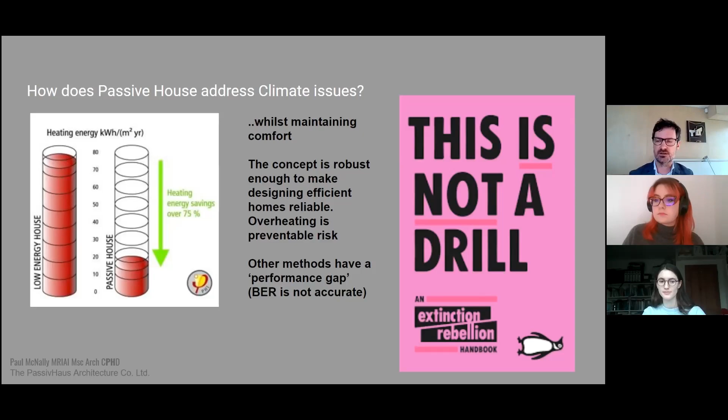So Passive House cuts through all those - from a designer's point of view, it eliminates all these risks and helps you design buildings that really work. We can get down to about 15% of the energy consumption of a conventional building with the Passive House approach.

The other thing to put into the picture is the Architects Declare movement. This is a concept that's new and emerging internationally, where various professions - in this case architects, but engineers too - are signing up to a voluntary declaration to deal with biodiversity and climate change issues, and to stand up and say we're going to work to best practice and change how we work, because it's pointless pretending that every architecture practice is acting to best practice - it's just not the case. There's so many things all of us can improve in how we provide professional services as architects.

You'll see if you read through this list, it's things like post-occupancy evaluation - this is where, even after we're finished our services as architects in the conventional sense, we go back for a year or 2 or 3 years and test the buildings, recording temperature, humidity and energy consumption, and ask ourselves: is this building performing the way I hoped it was going to, or set out to design it to?

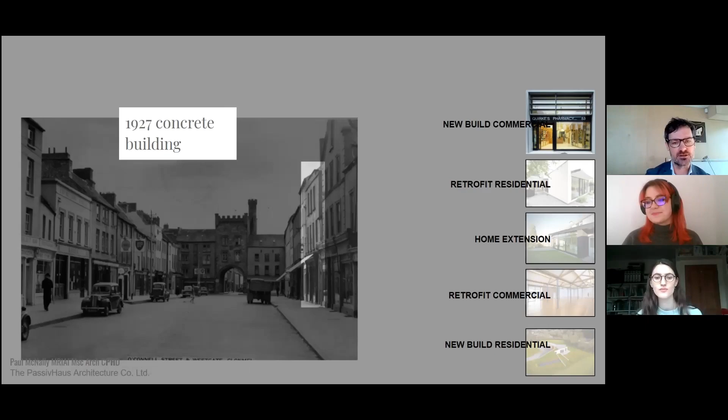The brief was to turn it from a terribly unheatable, uncomfortable building—where the client would have coats on in the back office and still be cold, it was so poor in performance—into something different. We retained part of the structure because we were supporting the buildings on either side, then completely demolished and rebuilt the building behind it. There's a laneway running up one side, underneath part of the next door building which leans over it, with an alley laneway access.

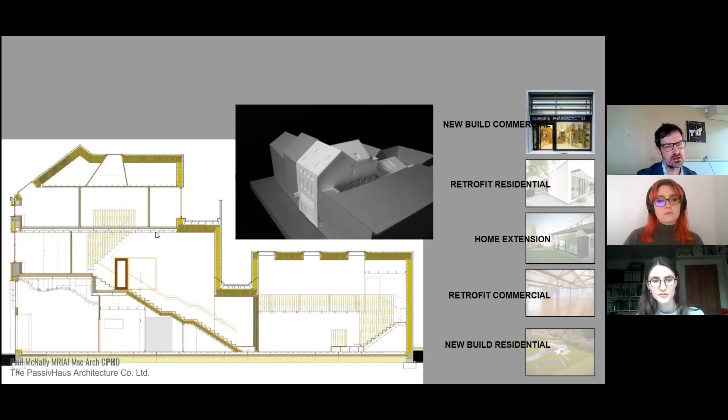And that gave us an opportunity to put an apartment over the pharmacy from a stairs off that lane. So this is a cross section through that stairs, if you like. So we have this 1.5 story shop floor of the pharmacy coming back to a 2-story mezzanine back of office space. And then we've got a two-story, 2-bed apartment above that.

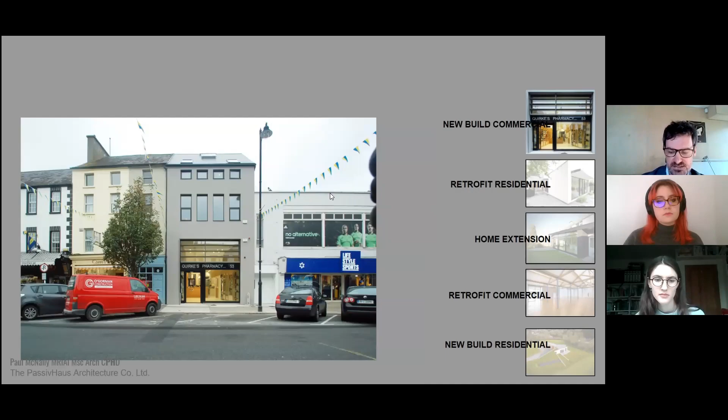So that's kind of the completed Passive House building slotted into the existing context of protected 18th century structures here and a 1960s concrete frame building there. And there's the laneway access underneath.

And there was a host of construction challenges of building in an urban centre with no rear of site access, but it was still possible to do it.

And that's kind of the image then of the shop floor with the double height space behind, and that's the shop counter. 1.5 stories at the front, getting lots of light in, solar control to stop overheating, which would be an issue if we didn't address it.

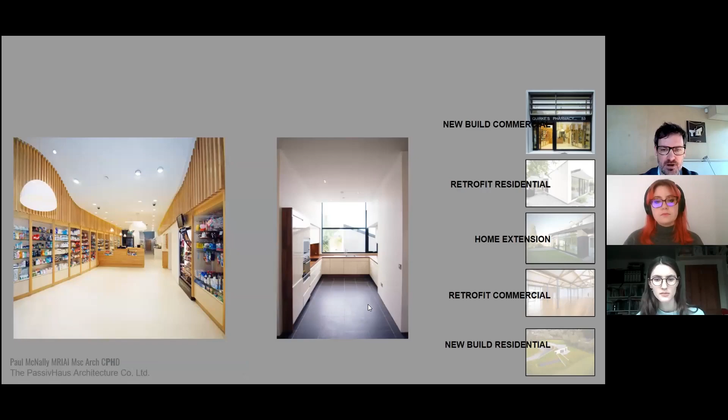And then that's an image of the apartment at the first floor level looking out to the rear. I won't spend too long on each of these projects, but just to give you a quick understanding of the results. So we achieved excellent comfort.

Client turnover went up. A huge sense of civic pride in Clonmel for this, to have a Passive House building. Ireland's first, there's only been 3 non-residential Passive House buildings in Ireland, and here's one of them, the first Passive House pharmacy, probably, there's not many of them in the world.

And it's an opportunity for learning then, like the local secondary school students come in here and do projects as part of their transition year on Passive House technology. And people are really interested in it. As I said, the well-being of the staff is greatly improved.

And then about a 90% reduction in the CO2 emissions compared to the building that we've replaced. And we've also reintroduced a residential use back into the middle of the town, which is really important because we all know about the hollowing out of towns and car culture.

Here's a 2-story, 2-bed apartment in the middle of town. There's no car parking spaces, and the client took a punt, in fairness, that this would be lettable. There was no guarantee that it was going to be lettable at all, and what turned out was the opposite.

Multinational companies, American multinational companies based in Clonmel, took up a rental on the apartment for staff of theirs that were coming over on sabbaticals from the States to do, say, 6 months training in Tipperary and then go back to the States. And the first group that took it loved the building and living in town so much,

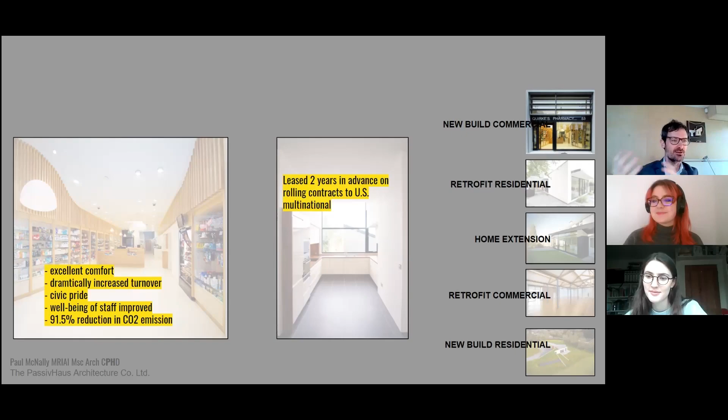So the client is delighted, and also now you've got a multinational that's really aware that their staff are living in a Passive House, and they're going back to the States going, what are we doing with these really dysfunctional buildings? And so it's helping to spread and disseminate that as an idea, which I think is great.

the certification process is the difference, that an independent certifier, going back to Germany, to Darmstadt, where the institute is, has looked at all the information that we produced. And if you do all the hard work and demonstrate that you've actually built a passive house, then you get the privilege of putting up a plaque on your building saying this is a certified passive house. And that really is, you know, the benchmark of quality then.

And that building then also won the RIAI award in 2015 for the best sustainable project.

The next quick project is just to show you, again, for a bit of variety, a retrofit residential project. So this is on College Road. It is a 4-bed detached 2-story house. This is the existing building before we renovated it.

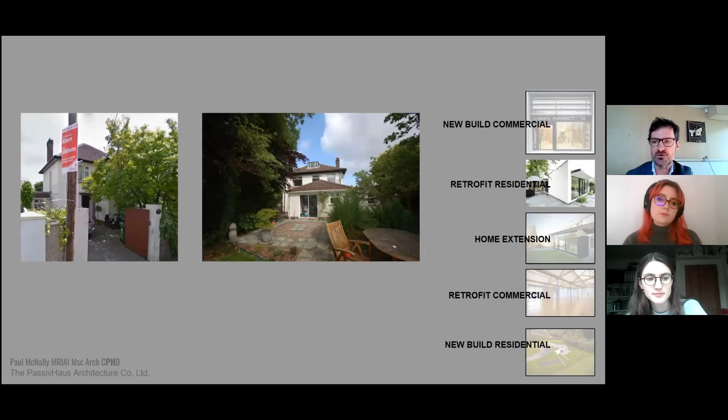And then a complete renovation, wrapping the whole building in insulation, triple glazing, dealing with all the air tightness, and then building on a passive house extension to it. And again, that's EnerPHit, which is the retrofit equivalent of passive house.

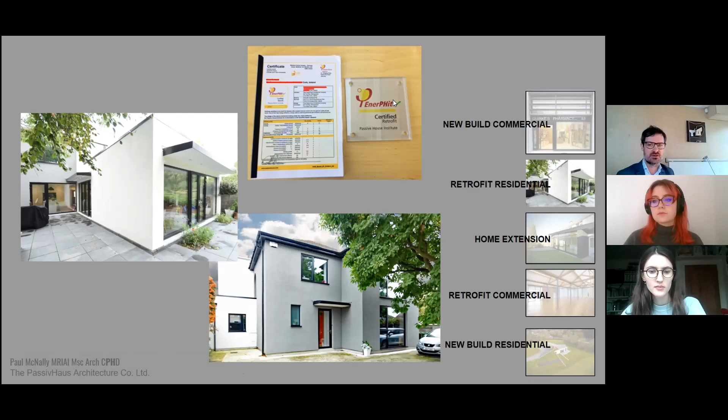So the next project then is a commercial retrofit. And this is a building that I completed, it's in Castlemartyr. And this is the main street in Castlemartyr, if you're aware of that, East Cork town.

And you have the humpback bridge that you cross on your way to Waterford, so it's right adjacent to that. You can see it when you're at the traffic lights at that point. And behind the main street, you have this Methodist church.

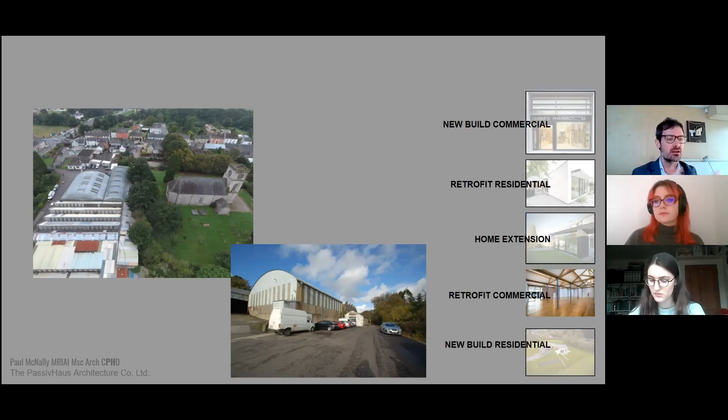The brief from the client, the kitchen manufacturing company, was to get rid of all this, demolish their old leaky building, and turn this into a state-of-the-art main office building. In fairness, it's quite a difficult thing to do with a building that's 200 and something years old. We had looked at just ignoring that building and doing a new build passive house office building, which would have been cheaper, but the client decided this building had enough quality and was exceptional enough that they would not turn their back on it, and they'd take on the extra cost of renovating it. This is what we started off with.

This is the existing building. You can see there's cast iron columns, these north-facing roof lights, which would have been state-of-the-art architecture 200 years ago for light industrial, really good daylight. You've got really good north light, so you're cutting out all that strong, direct southerly light that would cause glare, and you get this really even light from the north. So it actually was a fantastic building in its day, and really delivered a good environment compared to what people would have been used to at the time.

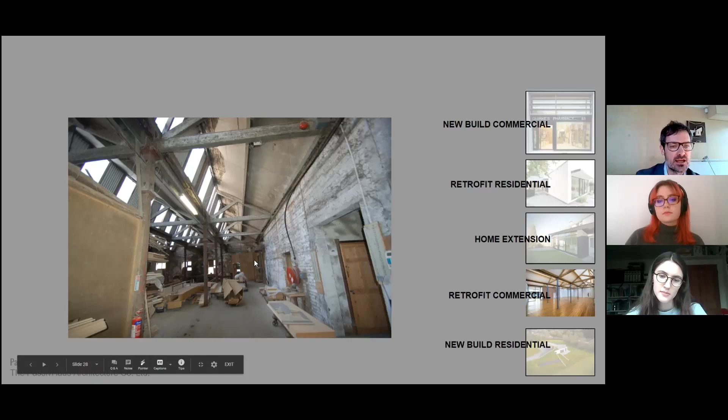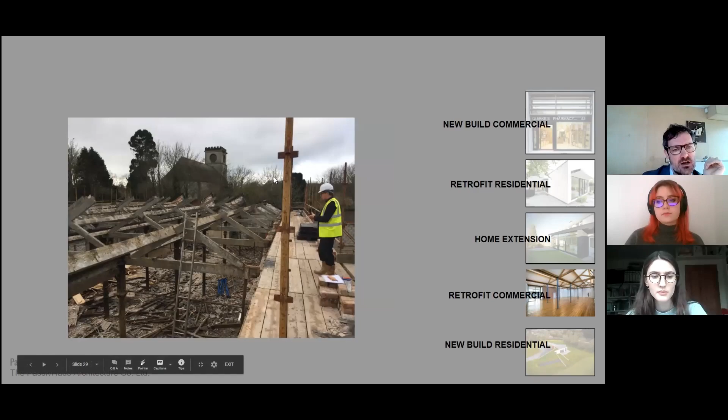But with these lovely existing brick rooms off this large open plan space, that was kind of what we were trying to hold on to. So we took off all the top of that roof structure, replaced rotten timber beams where necessary. We were able to hold on to all the original cast iron. In places, we could keep some of the original floorboards where they weren't too far gone, and then the original brick walls, the majority of them were salvageable.

The approach was, once it was cleared out, we put a roof on it and then super insulated that underneath, dealt with all the air tightness. We had to rebuild part of the wall, and then the existing walls, where there were brick and stone and lime mortar construction, got a lime plaster for air tightness and a wood fiber insulation on the inside. That's critical for these old buildings that have lime in the walls - you want to let the water vapor move through them.

It's called breathability. So there was a cork insulation in that lime mix, which starts to improve its thermal conductivity. Then you've got really good thermal conductivity wood fiber insulation, and that has a lime plaster on it. That creates a really good performance, but maintaining the original fabric on the outside.

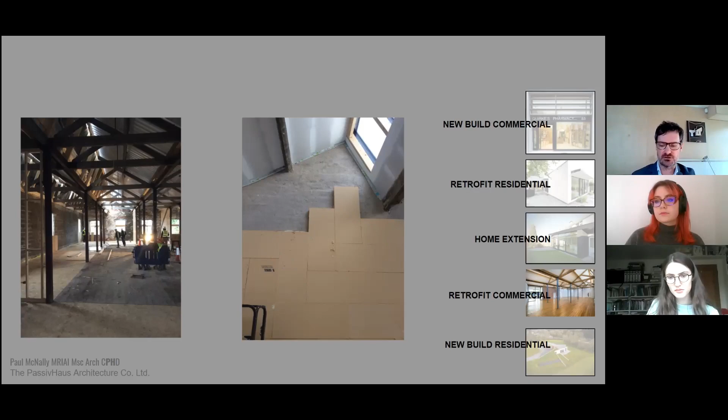Again, we're able to expose the original brick on the inside where it didn't need to perform a thermal function. But you can see the quality of the daylight here is fantastic - this is a really good place for the open plan part of the office. And then we've got cellular offices and meeting rooms around that.

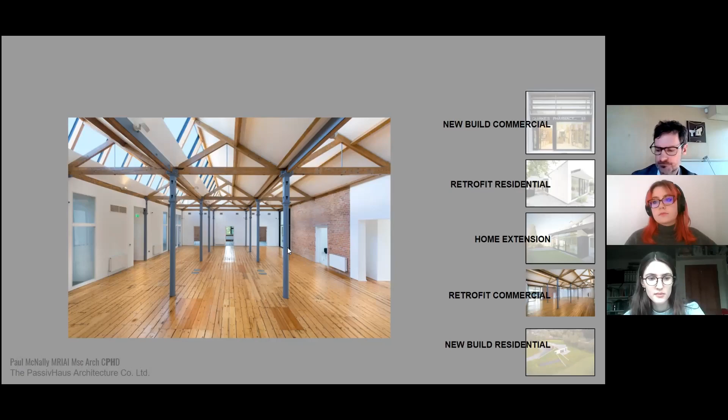The original fabric tidied up, repointed, re-roofed, and that's good to go for another, hopefully, 100 years.

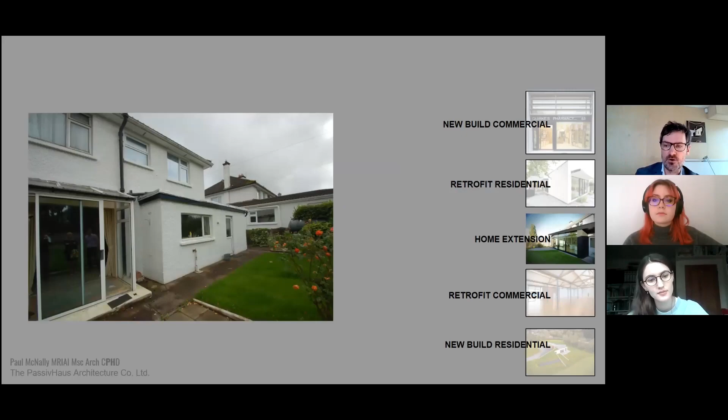Again, just to show you a different scale of the same approach - a home extension. This is at my own home here in Bishopstown, and this is what we had when we bought the house about seven or eight years ago, maybe more. This is the old original kitchen from the 60s, and there was a beautiful big garden, but very poor connection from inside to outside, and that's something that we're all trying to achieve these days in how we live. We want to kind of disappear that barrier between our external spaces and internal spaces.

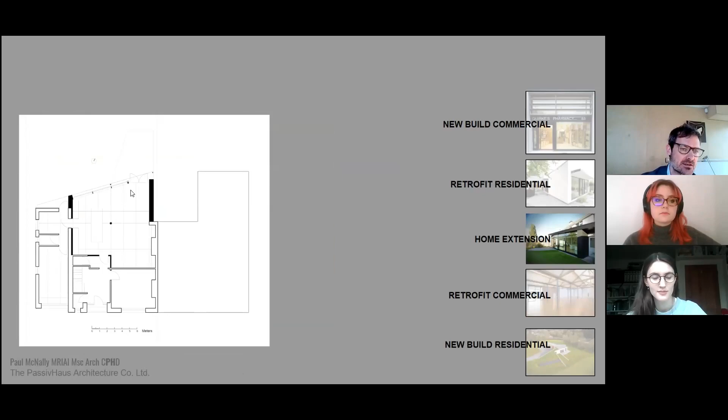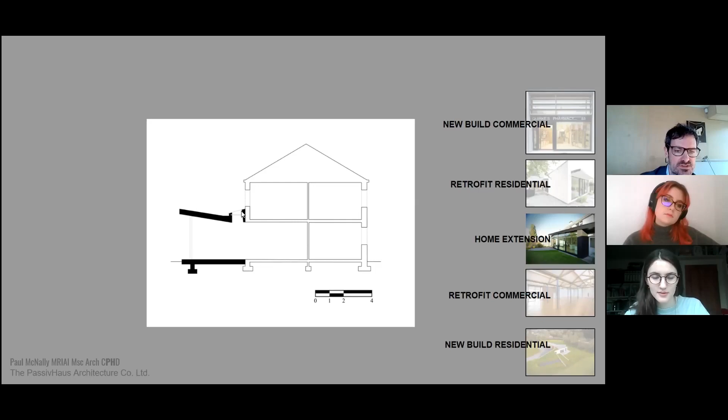So this is the back of the house, which is kind of northwest facing. The setting sun sets up here, so we cranked the plan to pull this space around and capture that setting sun in the evenings, and then tilted up the roof to do the same thing. So it's like a funnel that allows that evening light to get deep into the existing plan, so that this doesn't end up like a dark no man's land. And then we put a continuous roof light from one side of the house to the other across that point to get that light deep into the plan.

And there's that continuous roof light spanning across, and that's a triple pane roof light, which we wanted to get into as well, so really good insulation factor. Triple glaze - these are PassivHaus certified glazing, what's called curtain walling. So the glazing is continuous outside the structural part, and there's really good thermal qualities in where the glass sits, so high performance. All the thermal bridges are eliminated.

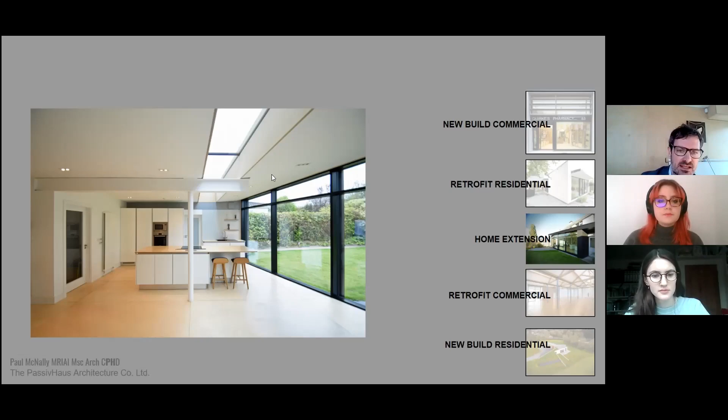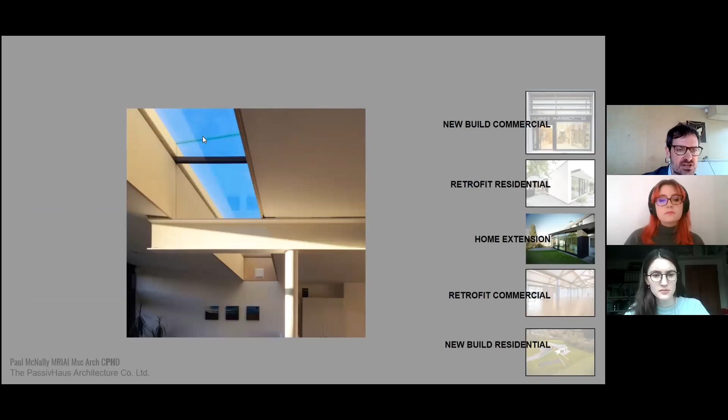And really thick insulation in the roof. This is the roof light again, just showing you the kind of detailing you have to get into at PassivHaus to reduce those losses at junctions. So you can see there's kind of a junction here. There's actually a glass at the upper level, which is what we call a rain screen, so that's doing all our weathering. But the space between it is actually pretty much cold.

And the heat, the thermal boundary is down as much as possible in line with the wall and roof insulation. So instead of having a triple glazed unit up here, which would have created a kind of tenuous connection at this point, we separate the two and drop the triple glazing down into this insulation, and we get insulation here above it.

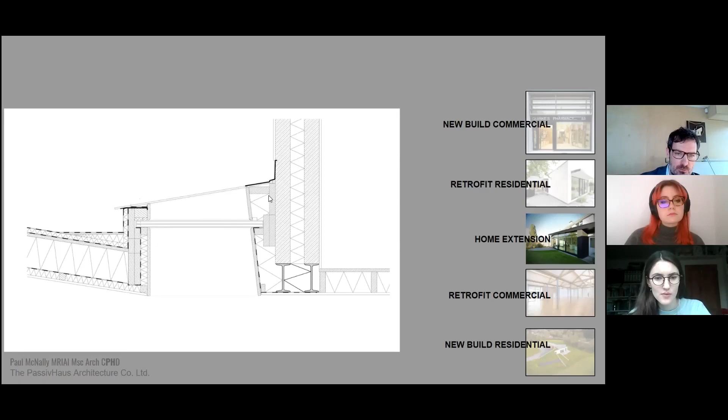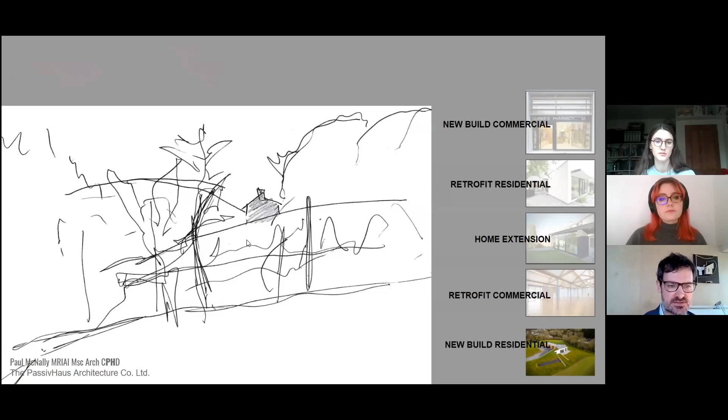And this was just a quick sketch that I did when I was there on site, just showing you this idea, showing the client that idea.

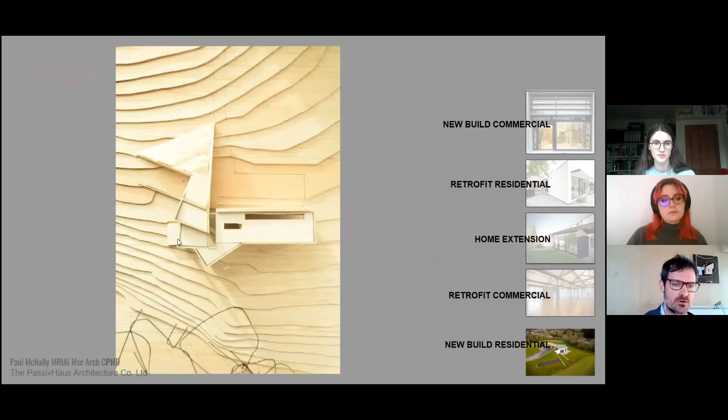So the design then - that alignment sets up this geometry where you have the dining room of the house pointing at that view on the horizon. And that geometry continues through the back of the building northwards, which gives us the ability to orient all the bedrooms on the eastern side of that block so that they're all getting morning sunlight. And then the rest of the living functions - your kitchen, dining, and sitting space - radiate around that geometry to track the movement of the sun during the day.

And that's not particularly a passive house necessity - that's just good building practice to get really good daylight quality. So as the setting sun is over in the west, it's shining into your living space, etc.

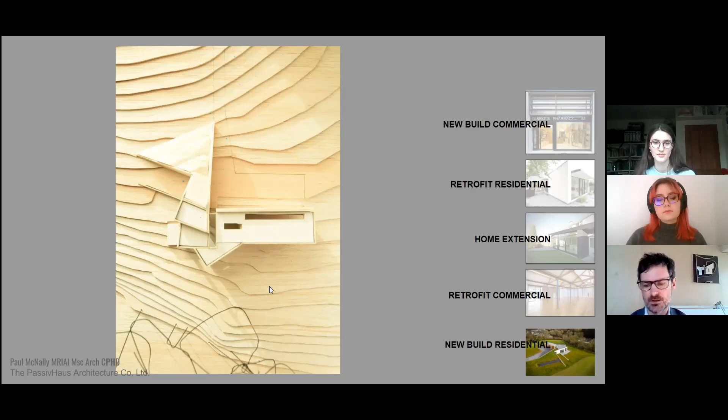And then because the fall of the site is quite dramatic, the idea was that we put in a series of terraces so that the floor levels would address that change. The building would kind of sit on the landscape rather than cut into it severely.

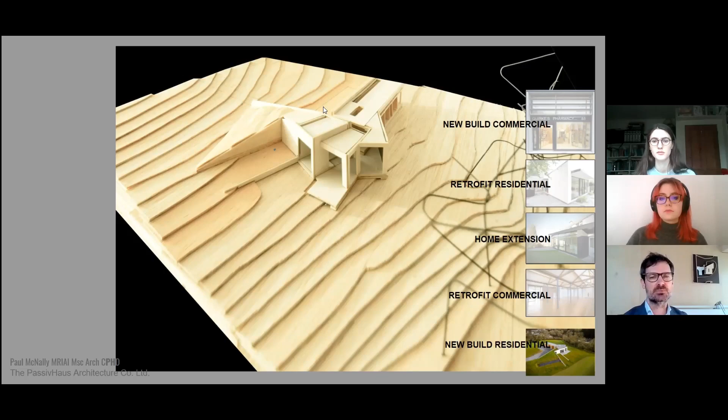And then the other idea was that the client wanted quite a discreet house from the public domain, from the road, which is up at this end. And the idea was that we would have a very blank facade facing the public road, but also would take the opportunity to just roll that landscape up onto the roof of the building, so that over time, when this becomes planted over the next couple of seasons, this will become very discreet. There'll be planting here, hiding that kind of car parking area - you'll have a blank facade. So the building is mute as you approach it, but then on the opposite side, it's almost fully glazed and very, very open.

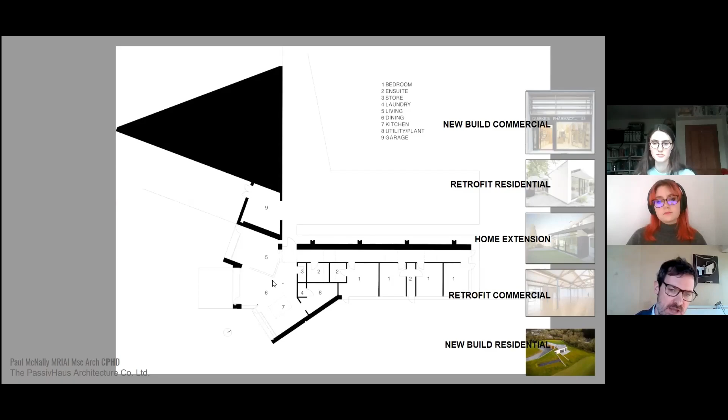So that's the ramping up of the earth onto the garage. You have your living space getting the western setting sun, your dining space facing that view, your kitchen space kind of getting the afternoon daylight and sunlight, and then your bedrooms getting the morning light.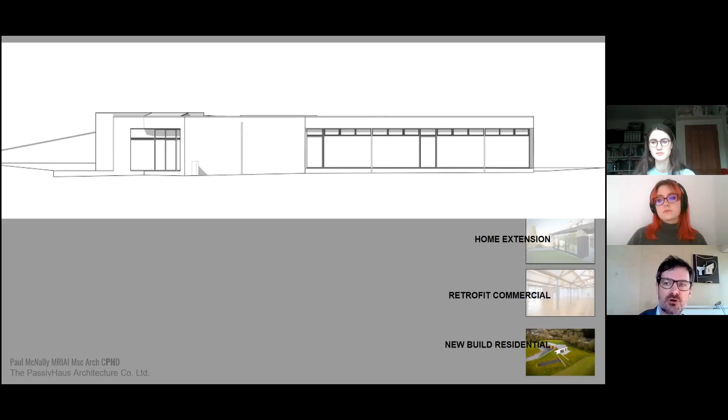That elevation is the bedroom. So the idea was that I was going to try and group all the bedrooms together and have continuous floor to ceiling glass that would bypass each individual dividing wall between the rooms. So it'll be consistent on the outside, or continuous on the outside, and wrap around the north elevation. Then we've got a blank wall where behind we've got some internal services like our utility and plant room.

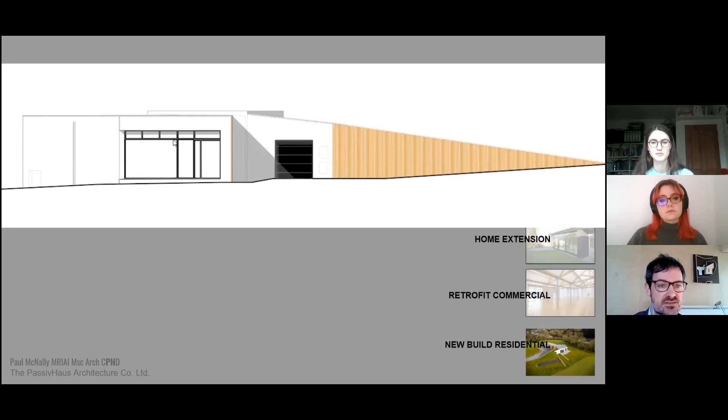And then this is the north elevation. So that's where the bedroom glazing wraps around. You've got a larch cladding on the ramped, the earth wall that's behind the retaining wall. This is the kitchen, dining, living room, and the garage underneath the earth.

And the idea on this facade then is that, again, floor to ceiling glass, but you can't do that in a low energy building or passive house without addressing overheating risk, or at least mitigating it. So the glazing is set back from the edge of the building. We've got these deep, kind of a meter or more projections over the head of the window, and also the side walls as well, so as the sun is rising it can give some lateral shading across those facades.

And if you don't do that, and you put a lot of glass in either a passive house building, or even a low energy building that's meeting just the current building regulations, and it's south facing, that building will overheat. And the building regulations have a tiny little paragraph that tells you you've got to address that. They don't tell you how to do it. And I think the software that you get for compliance with the building regulations has a little bit that I think is supposed to address that, but you really shouldn't be relying on it. It's not sophisticated enough, in my opinion, to address that as a risk.

And it is a significant risk, because if you overheat these buildings, even with opening all your windows and doors, you're not going to be able to dump by ventilation the amount of overheating you're going to have. And you're going to have very unhappy people who can't sleep at night because the building just can't cope. So you've got to address that. And architecture has to evolve and respond to that. So that's what's happening on that facade.

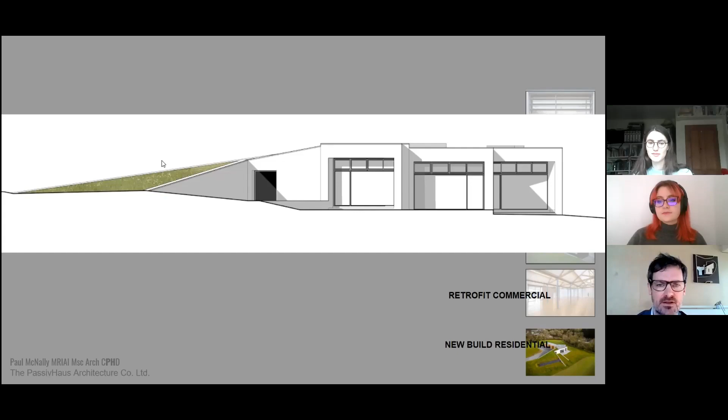And this is a quick sketch kind of showing the main approach to the building. And again, we have the ramped retaining wall on one side, with the idea that we're planting, tying that, dissolving that back into the field landscape. And then we'll have this very plain larch clad wall with these sculptural downpipe details on it. And the only kind of alleviation of that will be this where those two meet and have a glass entrance.

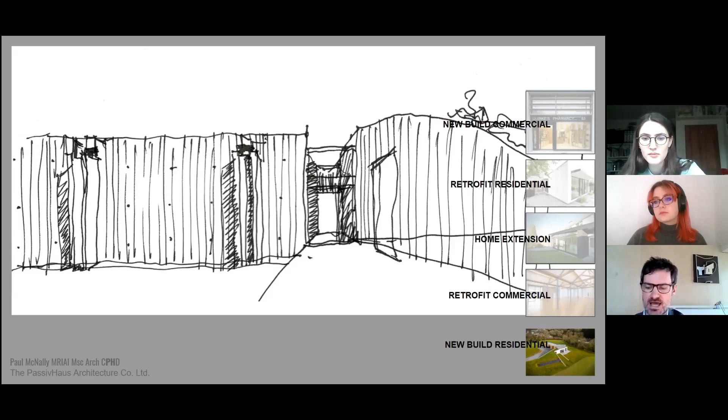And that's kind of what we ended up building. And these are the kind of sculptural rainwater elements.

This was kind of the first building where, because of the complex geometry in the plan, I had to go on site when the builders were setting it out. Normally a builder, if you give the builder a rectangular plan, they will set it out on site themselves. So all you have to do is give them one dimension from a boundary or two dimensions and they can find it.

I had to go and give them extensive cross references to triangulate how to position this building, because it was really critical that the center of the dining table had to end up with the mill in the right spot. And if we started off in the wrong point, it just wouldn't happen.

The other thing then is just to give you a bit of understanding of the level of detail that goes into passive house construction. So this is starting from the foundations, the cold part of the building. This is below what's ultimately going to become our insulation level. So this is a special block that is lightweight concrete, and you can load bear regular concrete blocks on this, and when you put in your floor insulation and your foundation insulation, you've carried the load, you've transferred the load, but you have broken it thermally.

So it's a thermal break. And if you don't do that, it's called a thermal bridge. If you had a regular concrete block here, it doesn't matter that you've got fantastic insulation in the floor and fantastic insulation in your wall cavities. If you've got a concrete block here connected to the cold, you're just going to lose a huge amount of heat down through that concrete block and into the floor.

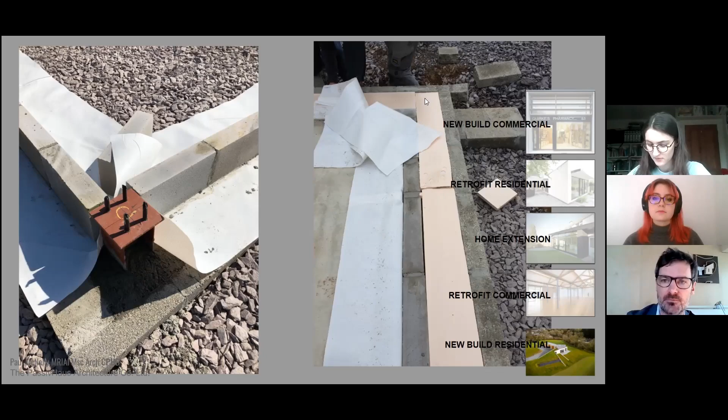And then as the building begins to continue on up, there's insulation under here. This is insulation in the cavity, a special type of insulation. These are the kind of calculations you do to look at the heat loss through those junctions. So there's that lightweight thermal block carrying the regular concrete block above it. You can use the regular block because it's on the warm side of your wall insulation, but that junction is where you have to quantify that.

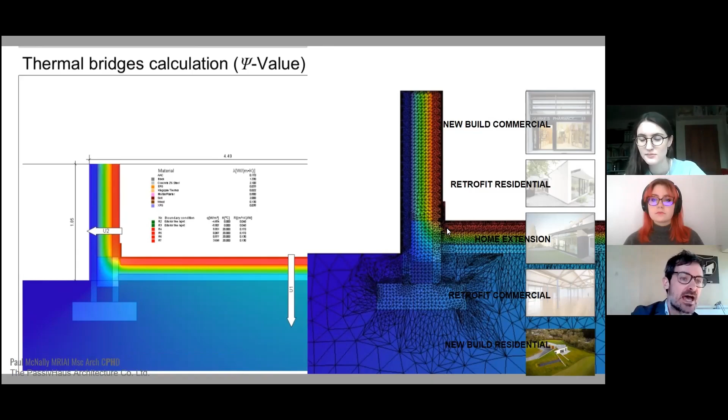It also allows us to check things like risk of condensation, and that's another part of the building regulations that people should become aware of. This is the ratio that's used. It's a figure between 0 and 1, and 0.7 is the factor that if you're below that for your surface, your temperature factor, you will get mold and condensation. If you're above it, you won't get mold. It's the limit at which it's safe to have your temperature factor.

So we check all these at the most vulnerable point of the building to make sure we're above 0.7. And here at this critical junction, we've got 0.9, so we're well above any risk of condensation and mold forming at that point.

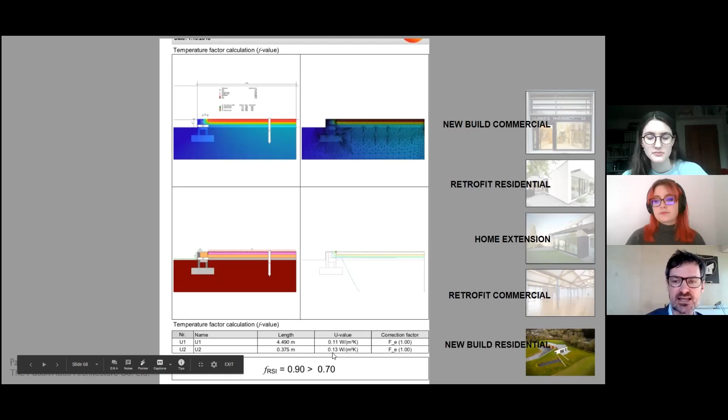But if you were to do that on a plan detail in the corner, in all the houses that we grew up in, we have mold in those corners where there's poor air circulation, and you've got this junction that's not great, and it's got a big surface area. So it's in these vulnerable points that if you were to calculate these, you would find that the FRSI, the temperature factor, is below 0.7, and now you have the conditions for mold. So it's that level of reliability that we're achieving here.

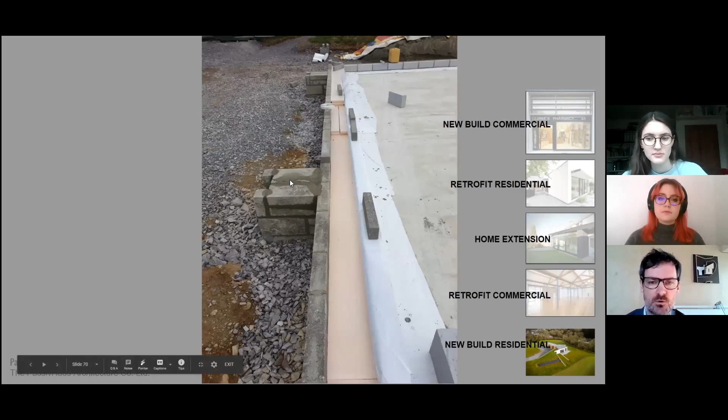This is the retaining wall going into it, starting to be built. These are the foundations for the rainwater downpipes. And we'll just jump through some of these details.

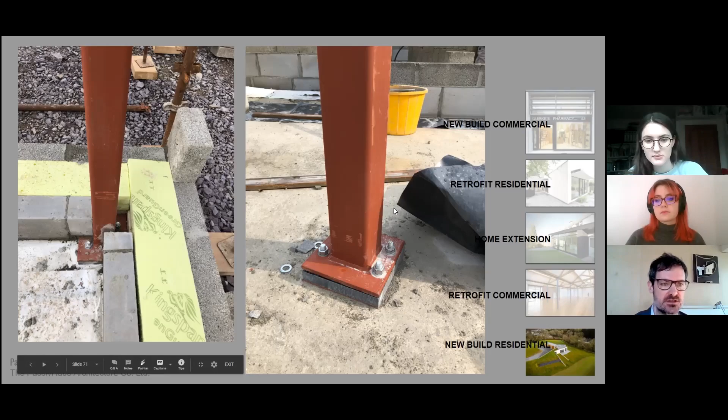So what's happening here is, this is the top of this stub column that I showed you, and that there is our structural insulation. That piece of insulation can carry the load of the steel and the roof above it, but break the heat flow through the steel into the steel below. Our floor insulation then sits on this and wraps that around, so we're getting continuity right across any of these things that would be a thermal bridge.

These are all lightweight blocks. So the window is going to sit at this point. That's our wall cavity, so here's our window. There's a big gap between the external leaf and the internal leaf. So this is cold, this is warm, and this is cold. And because that gap wasn't as big as I wanted it to be, I put in lightweight blocks here and here as well to reinforce and make it more difficult to lose heat through that point.

And these are boards. Ideally, when you want your insulation to all connect up, there'll be points where that becomes difficult. Like if your window element, its glazing and window frame, is insulated, you'd want to sit that window down on top of your wall insulation, but it's not load bearing. So you've got to introduce a load bearing insulant, a special board that has a good insulating factor but can carry loads. That spans across the cavity and allows our window to sit down on this, so technically it's directly above the insulation beneath it.

And this is the cavity construction. So these walls are 250 millimeters of cavity, nearly a foot. And conventional buildings now built to the building regulations would be maybe 60% of that.

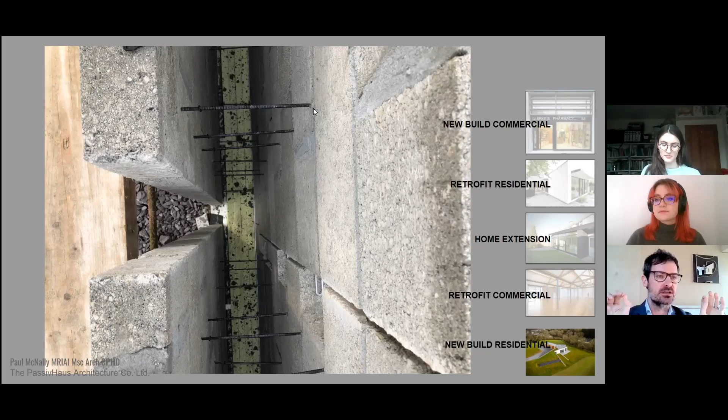And there you see, this is the kind of stuff you get excited about when you're really into environmental performance of buildings. This is a beautiful straight cavity with no mortar on the inside and none fallen down at the bottom. That's how buildings were built, as opposed to if you look into a wall cavity where somebody isn't trying to do this - I guarantee you'll see a whole load of mortar droppings across the bottom. So cement falls into the cavity when they're building the blockwork, and usually it gets left there, giving you a concrete connection between the bottom of your external leaf and internal leaf.

And then people wonder why they're getting damp patches at the bottom of their walls. So that level of inspection has to go ahead, and it has to be explained to the contractor. There's no block layer in the country that automatically does this, and no main contractor that looks to eliminate it when supervising. If the architect isn't looking for it and giving the builder prior warning, it will not happen. So I would explain to a contractor that we are not accepting any mortar droppings in a wall like this. Sometimes I'll say to them, have a think about leaving out a block every 3 meters at the bottom of the wall so you can get in there and pull out all the mortar. Some of them will do it that way, or find another way of keeping it clean. But once you give them prior warning, you end up with the good result.

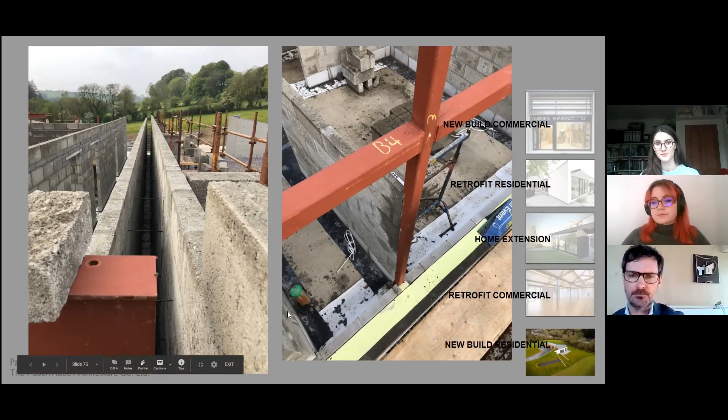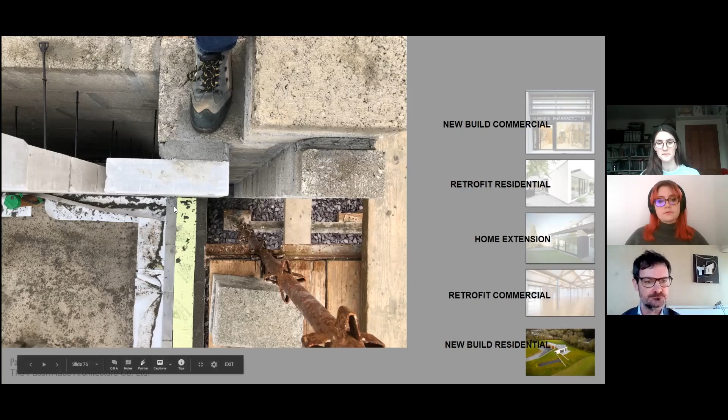So again, this is me just looking down into the cavities, just looking at where we are. That's the cavity. This is the warm part of the internal leaf. This is the cavity at the window. So when this is pumped with insulation, we'll have insulation in here, and then our windows, and the whole thing will connect up. So again, there's where the window will sit. You'll have a thermal break here, then a continuous wall cavity. And your steel here going down to the foundation is thermally broken, so all these thermal connections are separated.

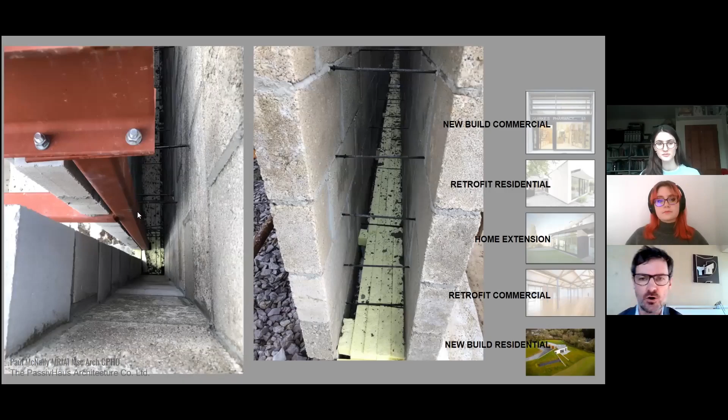And it comes down to - once you start, you can't stop. So we would have designed this building so that the timber roof joists would sit into the flange of the steel, and that steel would have insulation on the outside - it's not a completely cold structure. But then we realized, hold on a minute, we can just put a double trimmer at this point and connect all our roof timbers to that, creating a full void from there to there. So now if this is all filled with insulation and this is insulated, there's only one little connection of timber from a lot of that roof structure back into the steel at that point. And of course we checked that with the engineers, the loads are fine. So why not eliminate the thermal bridge if you can?

And it goes beyond that as well, that once you learn about the physics of buildings, you begin to understand how to do things like how to design a roof that doesn't have condensation risk. And when you're doing flat roofs, it's really important to get them right. It isn't a flat roof, it's a zinc roof, it has falls on it, but it's a ventilated roof structure.

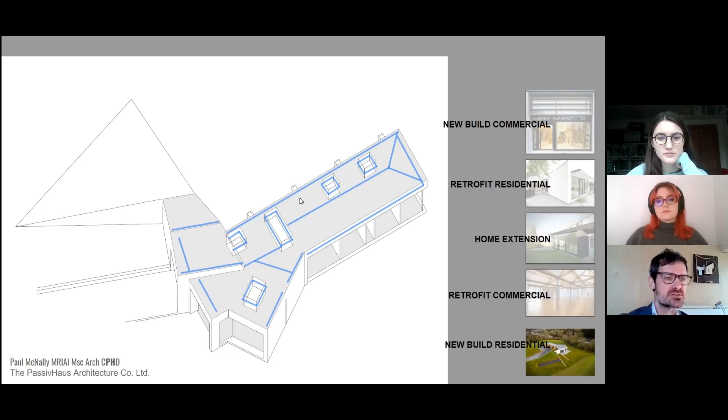This diagram is just showing you where all the vents are, continuous vents within that zinc roof buildup. You won't be able to see them unless you know where to look for them. But essentially this little diagram is working out with the contractor how to ventilate that larch clad wall once the parapet goes on. The idea is that our continuous larch on the outside will be here with a nice minimalist kind of capping on it. But on the inside, let's create a ventilation channel that tracks down here.

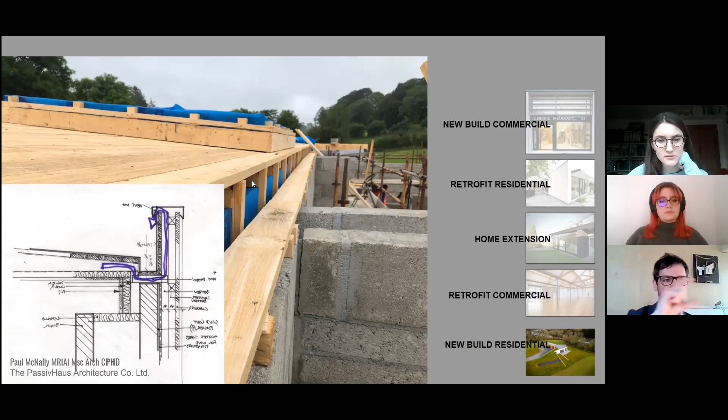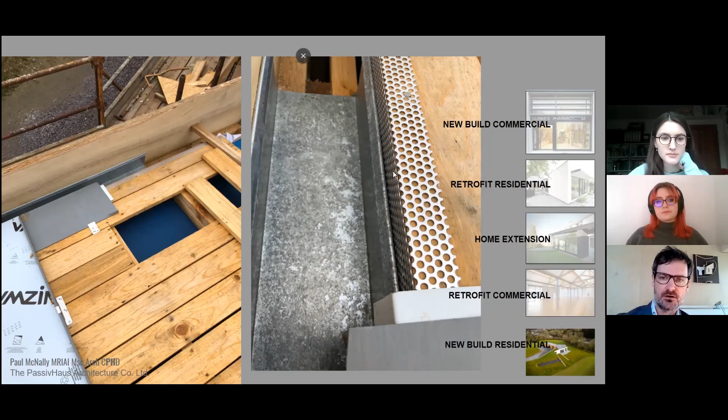And this is the top of the insulation layer. And this is the continuous ventilation that runs underneath the roof, and the zinc will be laid on top of this. So we've got this lovely big chunk of ventilation that's keeping that roof dry. That's looking into that ventilation air. So this has nothing got to do with internal ventilation. This is just protecting the roof. It's totally separate, it is just good detailing. And this is where that ventilation gets from the gutter up into the roof at all those peripheral junctions.

And then we're into kind of internal detailing. This is air tightness around the roof light. We'll move on from that.

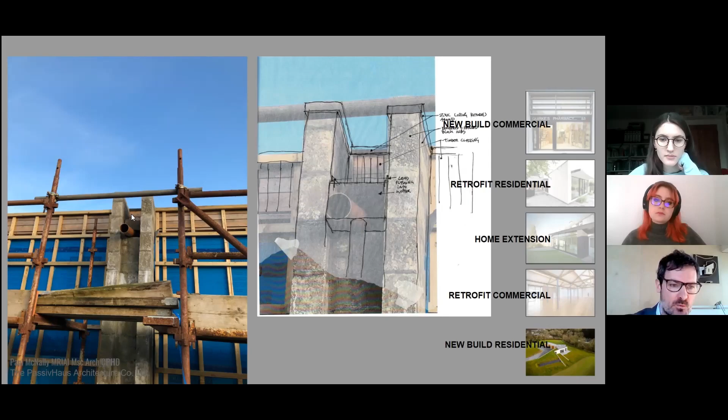Another little image that I think is nice is just showing you, okay, this is trying to explain to the contractor how are we going to finish this gutter, this downpipe detail in a way that is nice. This is where our larch cladding is going to be placed. So I take a photo of that and sketch over it. This is going to be our rendered facade at the rendered blockwork. We'll return the coping piece around. We'll build a zinc hopper to catch the rainwater as it comes out through the roof. And then it turns out quite neat.

This is just some internal shots of how the roof structure has to be built. Air tightness is a critical thing that's really difficult to get right first time around with passive houses. It requires forethought and explaining really explicitly to the contractor what the plan is. And it comes down to things like when the steel is going in at the very early stages of the project, a membrane has to get inserted at this point that allows a connection.

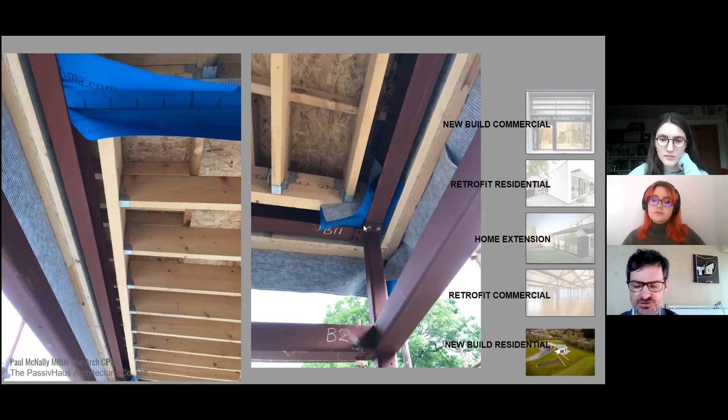Later on in the project, in the scheme of things, and there's another one here at this point. So as the internal blockwork walls are being built, that membrane gets put in before the wall plate, timber wall plate, gets put on top. And that sits there for two or three months until later on in the process, when your air tightness detailing, I'll just flick forward, is being installed.

So here where air tightness is being installed, that membrane has been put in three months beforehand and allows us to get continuity from this room over the dividing wall into the next room, over its dividing wall into the next room, so that we get a continuous air tightness line all the way through the roof structure.

We also have to photograph and inspect all the insulation for the Passive House Institute to verify as a third party. So I've got to go around and photograph a measuring tape showing that there's 350 millimeters of mineral wool at this point, and likewise at every other location through the building, floor, everywhere. And those have to be put into a folder and uploaded with your certification data. And if they're not there, you don't get Passive House certification.

So there's a whole level of quality assurance that goes into Passive House buildings that you don't have with Ireland's building regulation compliance, which is a self-certification system. Basically, I design my own building, I go and inspect it, and then I certify at the end that it was built perfectly. And nobody checks it. Unless there's a lawsuit at the end, nothing ever gets inquired into.

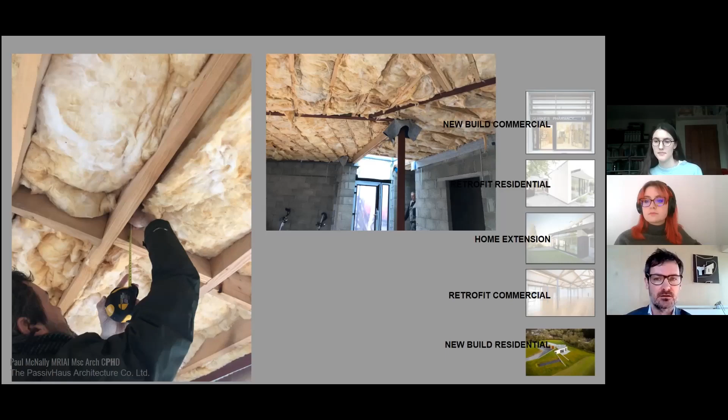Quick description of the level of detail that goes into passive house and the elimination of thermal bridges. This is another roof light similar to the one I did in my own house, where we've got triple glazing lining up with the roof insulation. It's much easier to buy an off-the-shelf roof light, but it won't perform as well as this, because we don't really care about the losses up at this point - we've dealt with the thermal losses down here and this connection.

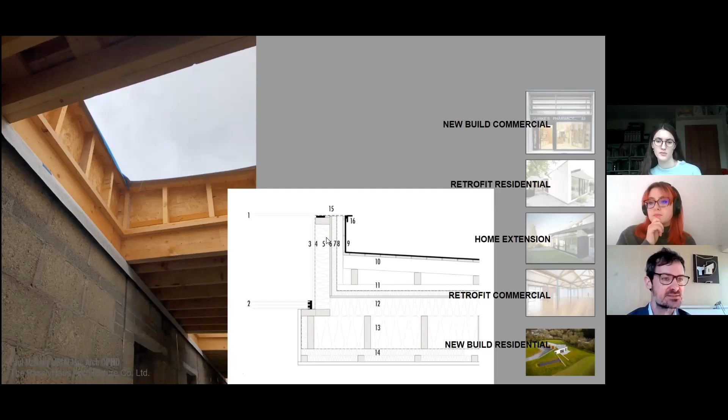This really is a rain screen. We've still put some insulation in here, detailed well from a ventilation and air tightness point of view, and condensation risk. But it's far superior to an off-the-shelf, even top-of-the-range PassivHaus certified roof light. You can buy them with a special upstand, but it won't be as good as this - this is poor compared to having the thermal envelope down here.

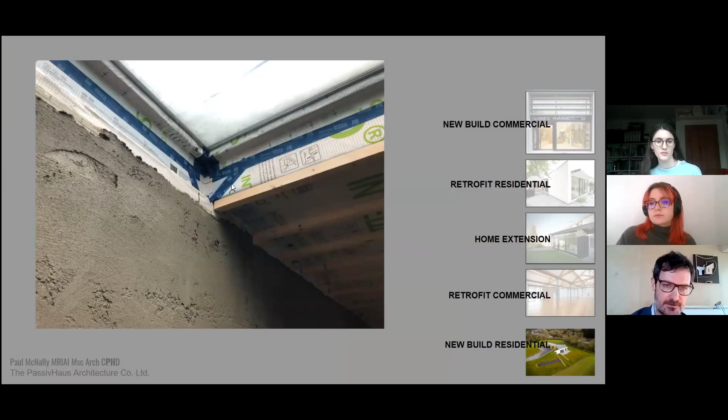And then we get air tightness coming up, connecting to that glazing. That's how the finished detail ends up looking.

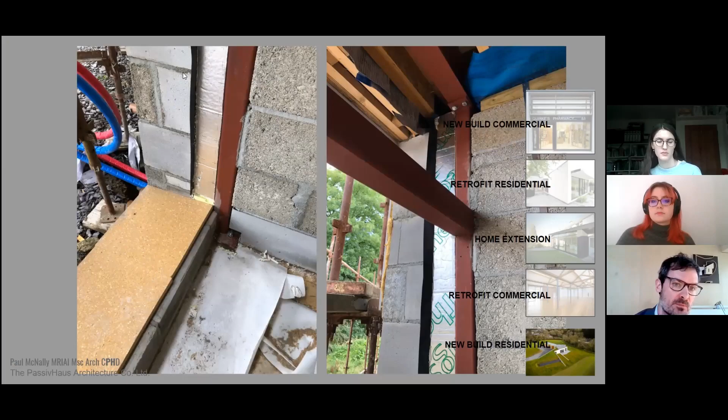And then things like the window installation - this allows a good sill detail around the window, where the window meets the wall, low thermal conductivity blockwork, good cavity that's been pumped. Then air tightness - the window gets taped back onto the wall, and this all gets plastered to give connection between the concrete masonry and the wall in terms of air tightness.

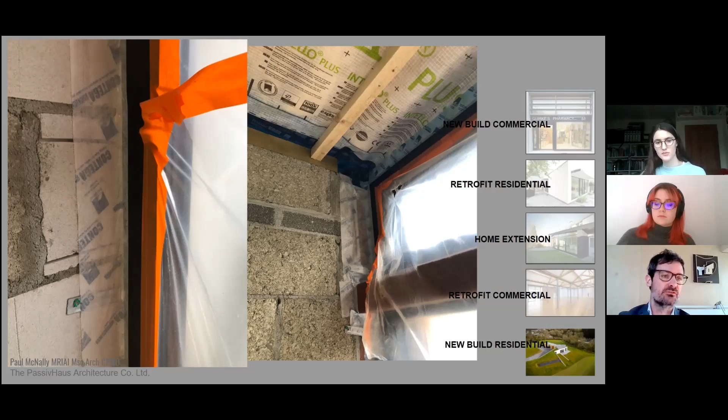There's a really high performance air tightness standard that's quite hard to achieve with PassivHaus certification - about a third of the losses you'd expect to reach, maybe even less, maybe a fifth of what you're expected to reach with building regulations.

We have to think a lot about services, because you can build these wonderful airtight, super insulated structures, and then a subcontractor doing mechanical ventilation or electrical installation - if they're not on board and you haven't pre-thought how services are accommodated, a guy will slice into your air tightness membrane, run cables out onto the solar panels on the roof, and not tape it up again. You plaster over it, and you can't pass your air tightness test, and you don't know where the leak is.

So by designing out those risks, the air tightness layer is up here, and we're putting in 100 millimeters of an insulated cavity below that can handle all your wiring, recessed lights, duct work, and there's no excuse at all for that air tightness layer to be punctured.

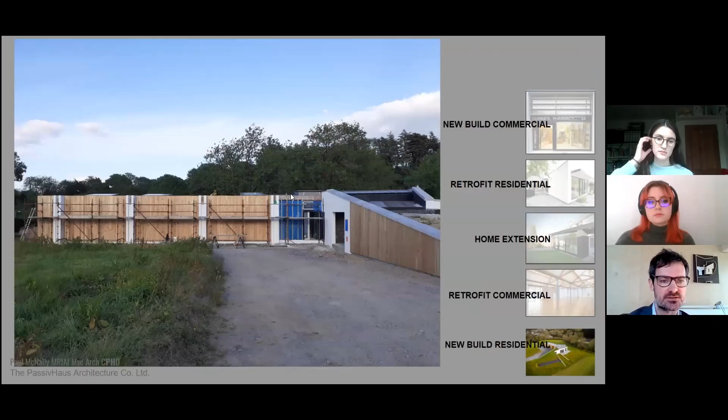That building in this image is ready for plastering. The larch timber cladding is about to be installed outside. That's the larch complete, the superstructure complete.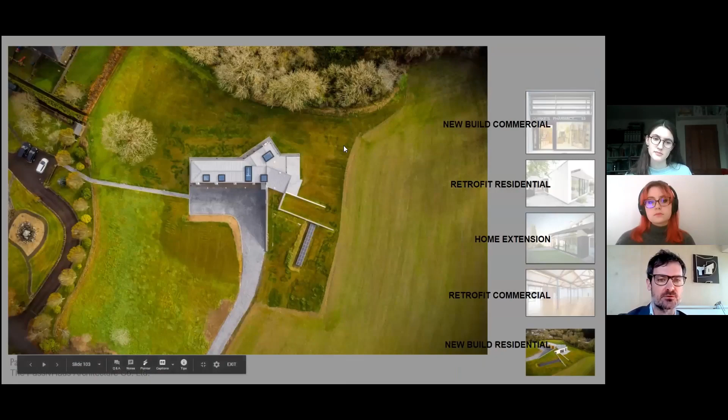At this point the building is ready to be occupied. We still have all our external planting to be done next spring and this summer, which will really mature and settle that building into the landscape.

Here you can see the solar installation, the grass roof coming onto the garage, the zinc roof with these significant roof lights over it. This is the terracing as the building steps down with the landscape.

That's the living room facing the western setting sun. There's the orientation towards the mill - kitchen, bedrooms facing the rising sun.

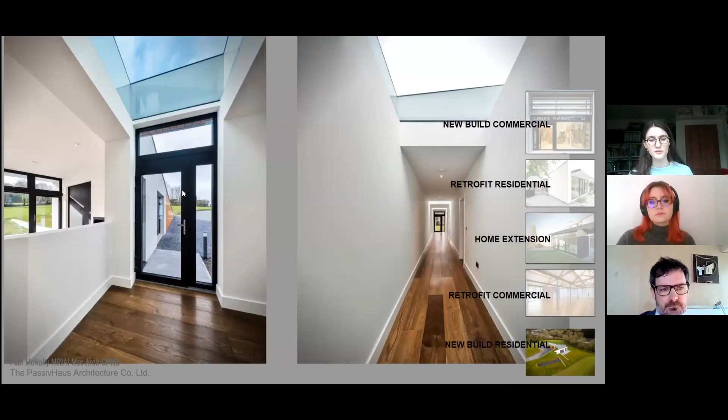That's the entrance, that's the main corridor with the bedrooms off it. Kitchen space, which has a roof light that's the exact same footprint as the island.

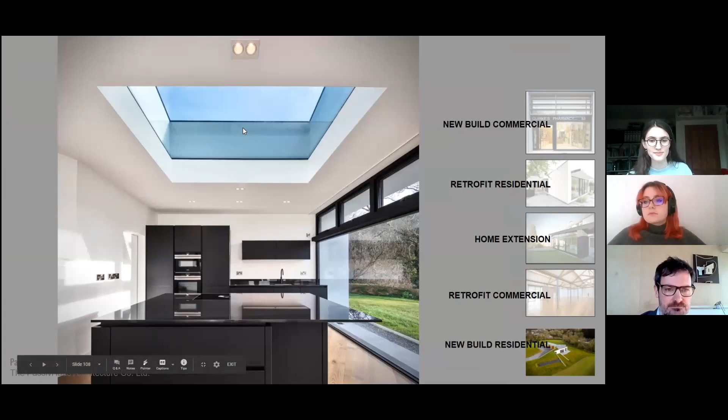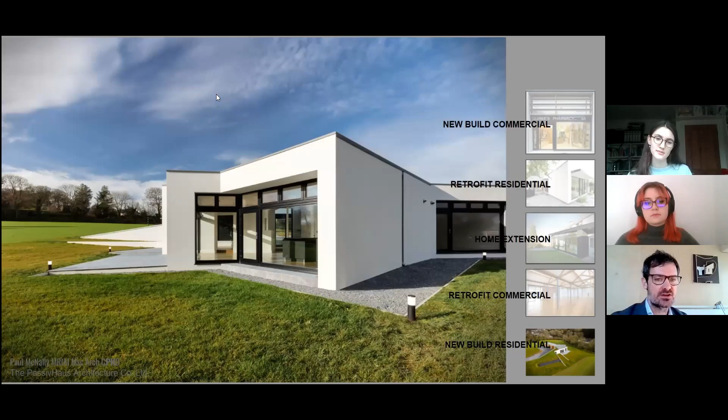This is the shading, taken in winter. The idea with these is that the winter sun, being lower, gets deep into the building, but when the sun is high in summer at a high angle, these throw shading across the glass.

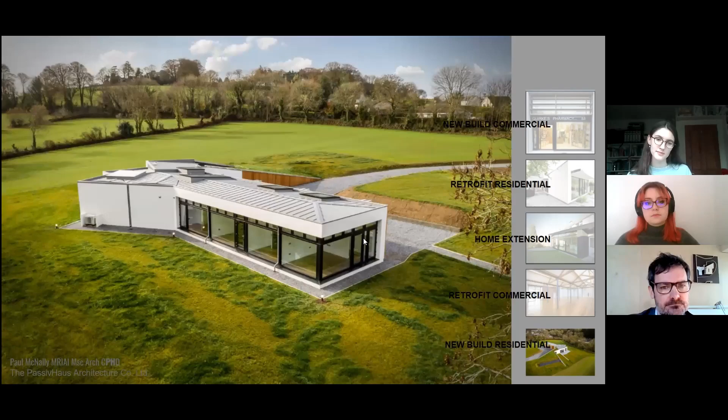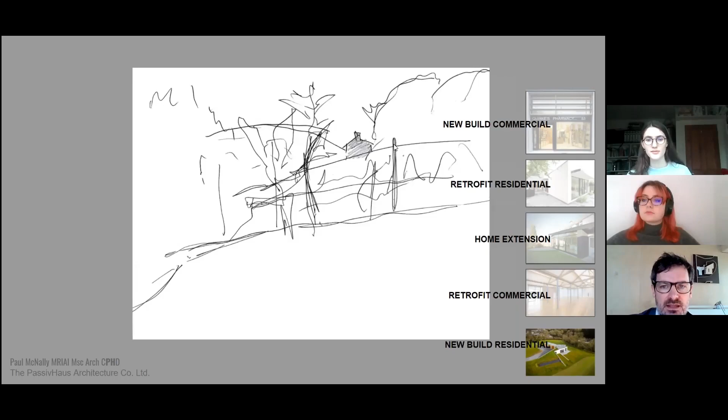And that was just to remind you, that's the original sketch of the idea of framing the mill gable in the hillside. There's me explaining to the photographer what we're trying to achieve. And you can see there's the mill nicely framed at that point.

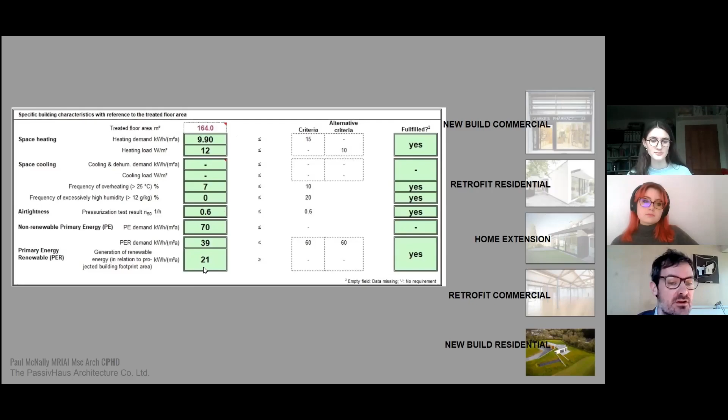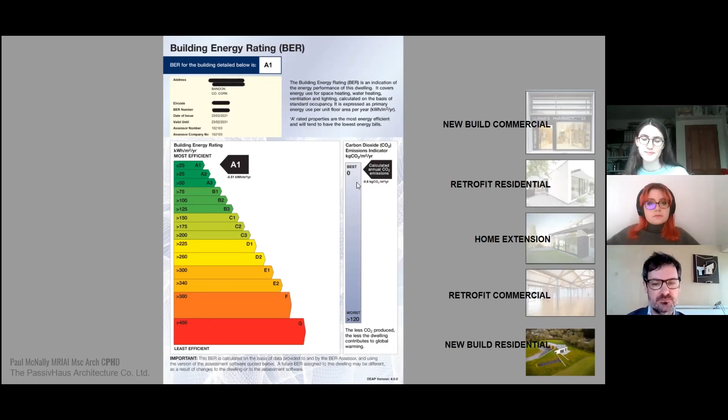In terms of our building energy rating, the building was an A1, which is great. PassivHaus doesn't always need to be A1 because, as I said, the building energy rating isn't really what you should be using to design low energy buildings. It's not nuanced enough, not explicit enough, there's so many things it doesn't take into account. But in this case, not only did we get an A1, we got a minus figure on the energy consumption because the solar photovoltaics are producing enough energy, and a minus figure on the CO2 emissions. So that's a bit nonsensical, because obviously it is consuming some energy and does have some carbon emissions, but it's too efficient for the building energy rating system.

And if any of you want to browse this building, because you can't do site visits anymore, the whole building has been mapped digitally. So you can go on with that link and walk through the building, and this is a live 3-dimensional walkthrough. You can move outside the building and move through the whole thing.

But it's guilt-free hot water, so you can have the longest shower, rainforest-type shower. And this is the idea of comfort. So doing an eco building and living in an eco building, we're not going back to living in yurts. This is high comfort, beautiful, luxury, but you're doing it without having a huge carbon impact.

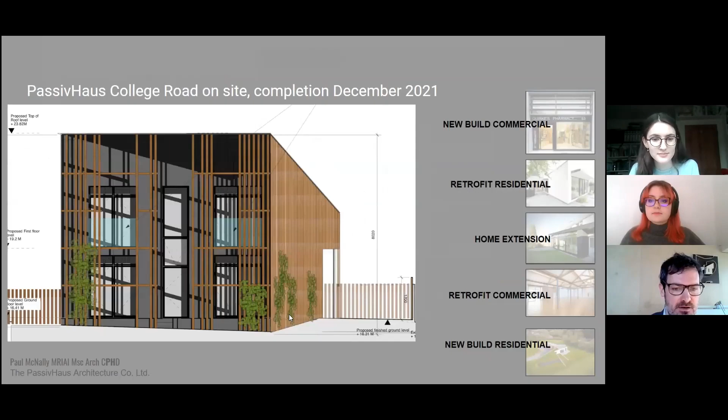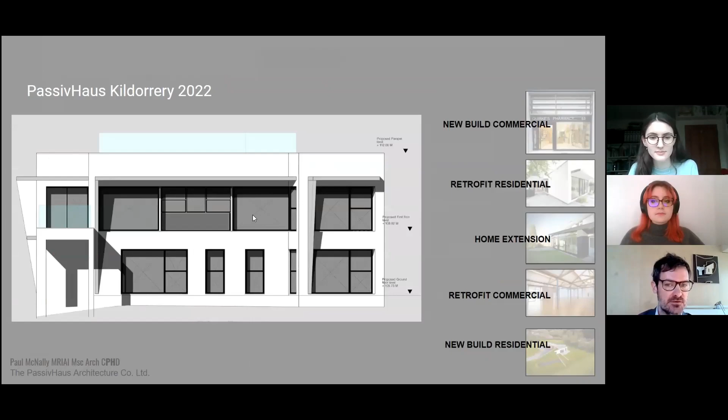This is an upside down passive house in Kildorrery, construction end of this year. And this is a really interesting one, the last one I want to finish on, which is one in Clonakilty. It's a really low carbon one, so we're not building with concrete blocks, it's timber frame, charred larch facade. It's got this stealth bomber type form, which gives really good surface area to footprint ratio. So this is going to be about one third the energy consumption of a passive house, have loads of photovoltaics on it, so it's probably going to be an energy plus house. But also the embodied energy of the construction, because it's timber frame and timber cladding, means this is really as good as you can go in terms of environmental building. And it's a replacement building - their own house burnt down.

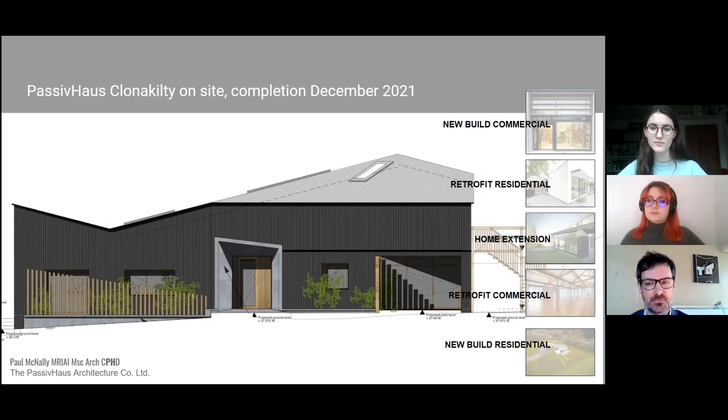So we're just replacing an existing building with all the existing site services. That's what's coming, that's on site at the minute as well, for completion later on this year.

Thank you, Paul, for giving us this lecture. That was actually really interesting to see just how passive design isn't just subject to housing, it's also subject to commercial builds and public builds, and how you have to adapt that in accordance to their function. I think it's quite informative, particularly for anybody interested in environmental and sustainable design, and how you also brought up retrofitting, because that's a big thing we're going to have to do in the future, is to look at our cities and see how they're going to work.

Alice, do you have anything to say? Yeah, I completely agree with everything you said. I think for me, watching that, it kind of feels like a no-brainer. What I was wondering was, how do you think passive house within the general public would become the norm? Do you think it's to do with awareness or changes in regulations, or how do you think we'd go about it?

So every client you speak to on the domestic side wants a passive house. It's amazing how forward it is in the public perception, everyone seems to know about it. Whether they want to go to the expense and complexity of delivering it, that's not for everybody yet. But probably, if the profession adopted this and took it on board as being what everyone does, then the costs are going to drop down, and it's the same for builders and suppliers. Once the market matures and the profession matures, it gets easier and more affordable for everyone.